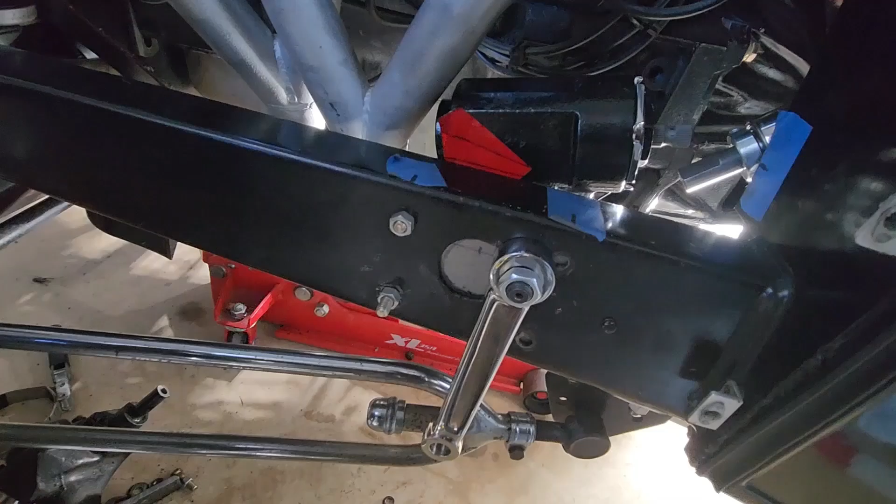Had kind of a brain fart this morning, in that if you look here, that line is the original line on the workbench where I took this flat surface and made it 43 degrees to match the angle of the old Ford column, which is about 43 degrees. I didn't think it all the way through, I guess, because I thought the box has to be at 43 degrees, but it does not.

As you look here, this was my first line at 43 degrees. But bolting in the vertical plate to the inside so I could get a depth measurement here to put this zero clearance against the frame, which is about a quarter of an inch. Might be a little more, but if it is, I'll be able to hand grind that section off to get that extra bit of clearance.

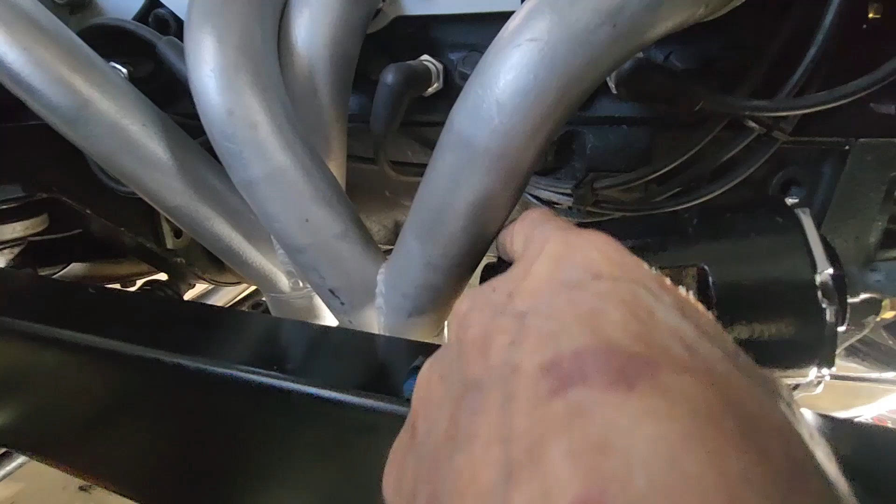So anyway, the brain fart is that the box doesn't actually have to go 43 degrees. In fact, it's tilted 30 to 35 degrees lower, which gets the box away from that bolt down there on the flange for the header, and puts it in a position that maximizes space on the top two pieces next to the header. That's got to be thick material, so I can grind that off a little bit, and if worse comes to worse, I can dimple that side of the header if it proves to be a problem. But I don't think it's going to.

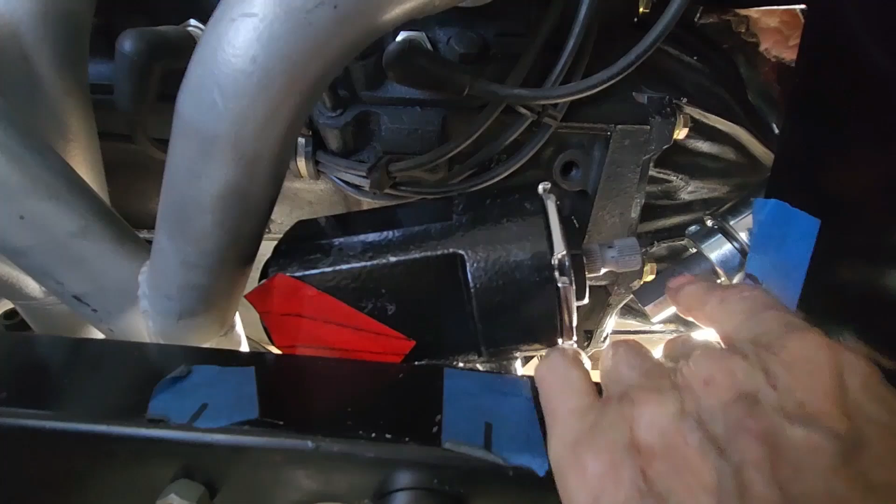Another good advantage of this is that it lessens the angle of the shaft, which requires less of a degree of bend for the U-joint connection to the column steering shaft.

So what I'm going to do now - by the way, this is about a quarter of an inch, so I've got to get that light out of there - this quarter inch is to move the box outward and maximize the extension sticking through here.

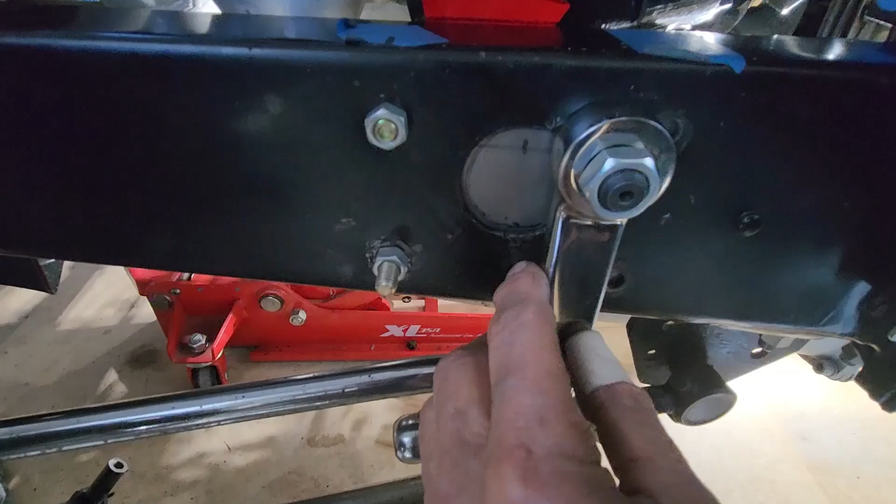So with that, I'm going to pause and pull the steering box back out so I can get the plate off. Be back in a bit.

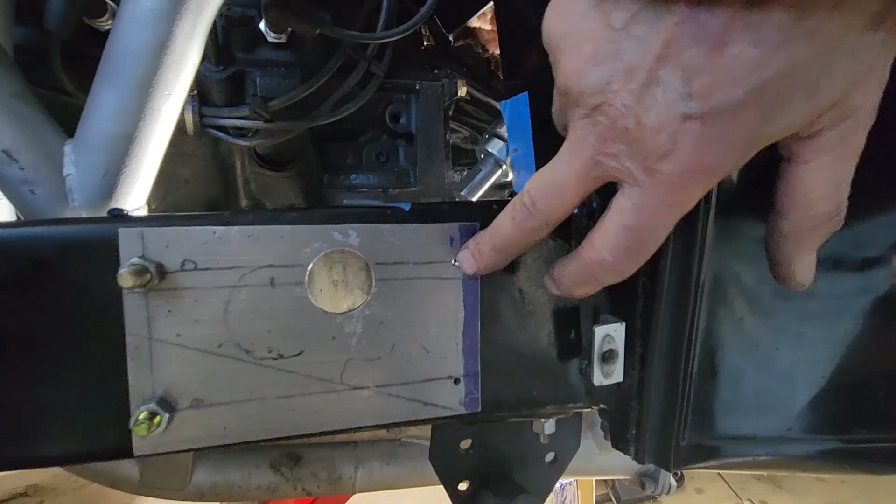Hey, back same day. I've marked the location and drilled pilot holes in the adapter vertical frame plate here and here, and before I open them up to 3/8, I bolted this down and used it as a guide to drill two pilot holes into the frame. So now I take this off, drill these out to 3/8, and open the pilot holes in the frame to 3/8, and that should take care of that. I'll be back.

I'm back, same day. Okay, the vertical adapter steel plate on the inside of the frame rail is fitted in and bolted down. I had the two new holes, as you saw in the previous video piece.

I had a rivet here, an original '32 rivet, that in June of '60, when I first got the car, was one of the first things I did - I cleaned all the welds off all the frame, ground all the crap away in preparation for painting it with black lacquer. I missed this rivet here, not sure why.

Anyway, I'd already ground this flat on the inside so the plate would fit flush to the inside of the frame. I thought I'd just pop it out, and it didn't pop out. Then I said, well, screw it, and just ground it off.

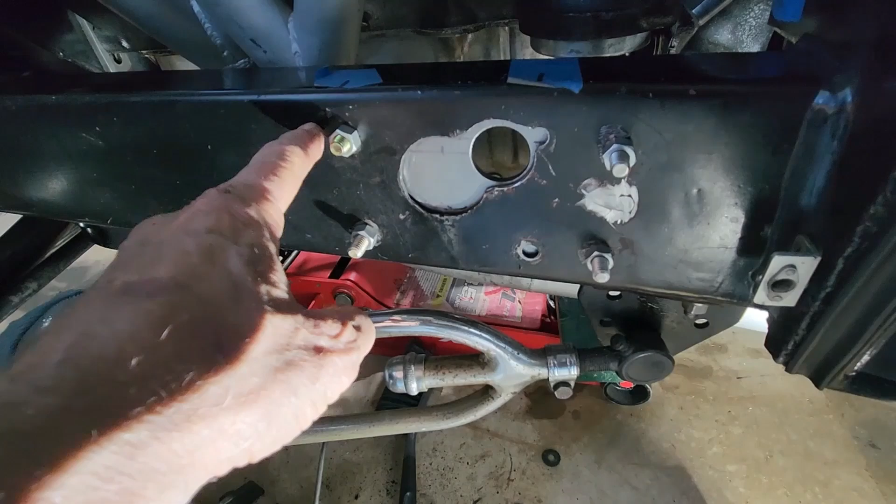It's flat now. The reason I'm concerned about that being flat is that cosmetically, to hide this mess, I'm not going to bother trying to fill this in and weld it and all that. I'll leave it open, but what I'm going to do is make a cover plate out of thin sheet metal, 18 gauge, maybe 18 or 20.

That will be a rectangular plate held in place on the outside with the same bolt holes that hold the adapter steering box plate. What that will do is cover this area and cosmetically make it look better.

In the open frame hole, obviously, I don't really want to get into welding up holes in frames and stuff. But that's where it's at. That's fitting and done.

Hang on a second. There. Put that light out.

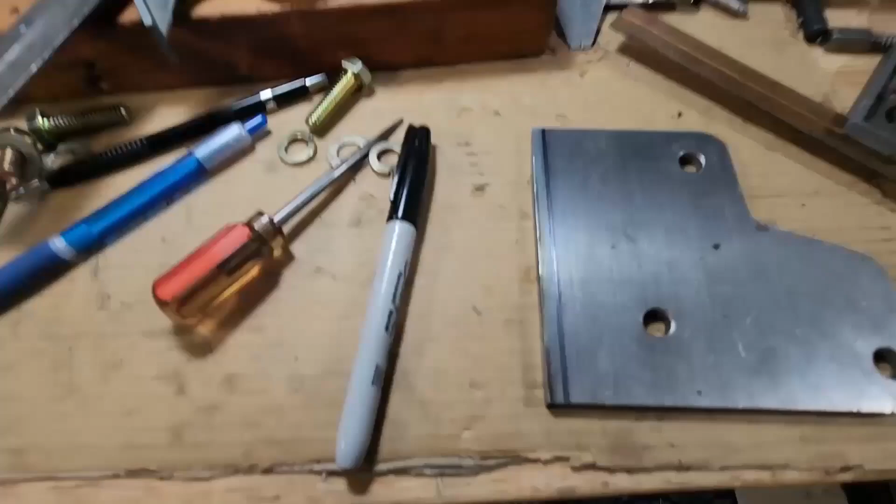What I'm going to do now is, having made the depth measurements for how close the steering box is to the outside frame rail where it sticks through the hole I made, my dimensions indicate about 1/4 inch, and to that end I've got this marked off 1/4.

I'm going to go over to Lou's tonight and visit with him for a while. I've got this marked, and I'll have Lou cut that 1/4 inch off, which should then move the plate in.

This line at the edge of the tape is the 43-degree mark, where I first was thinking this had to be level with the steering column. But that's not the case. It's actually in a better position when it's on this line. This would be the horizontal 0-degree line on the frame rail.

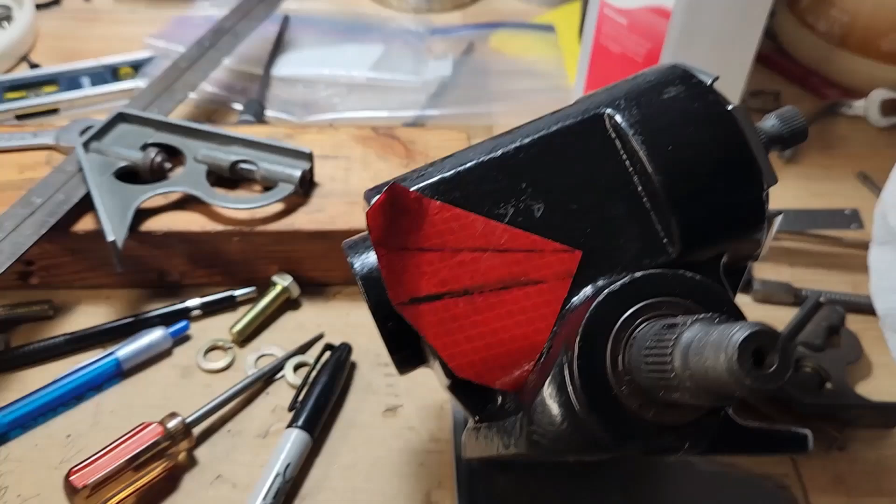Whoops, dropped the camera, or the phone. Anyway, as I was saying, this will be the new horizontal line, which is better from a number of reasons.

That puts these two corners at a better clearance to the exhaust header, and moves this away from the exhaust header flange bolt, so I don't have to worry about that. And yet I've still got the capability to grind these down a little bit if it's needed. That ought to be easy enough to do.

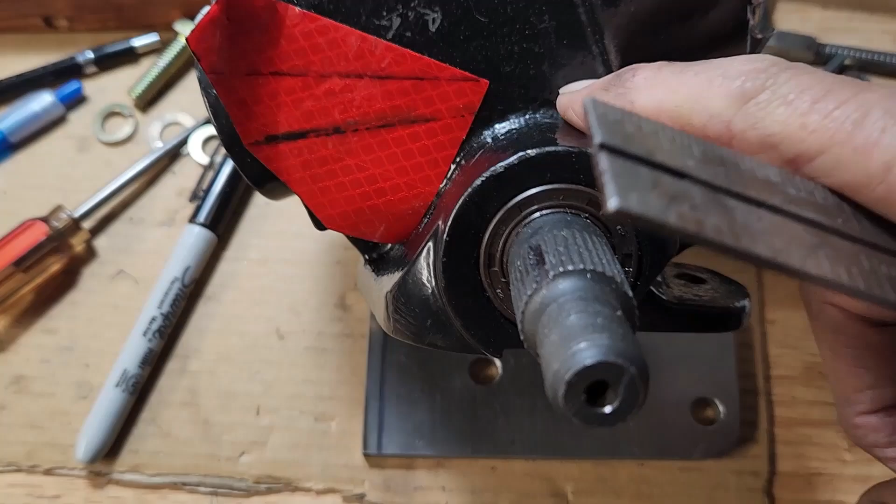The thing about it is that this was the original angle, but when you come down here, it's still using this point as a pivot point. It's still going to fit in the frame, which is pretty good.

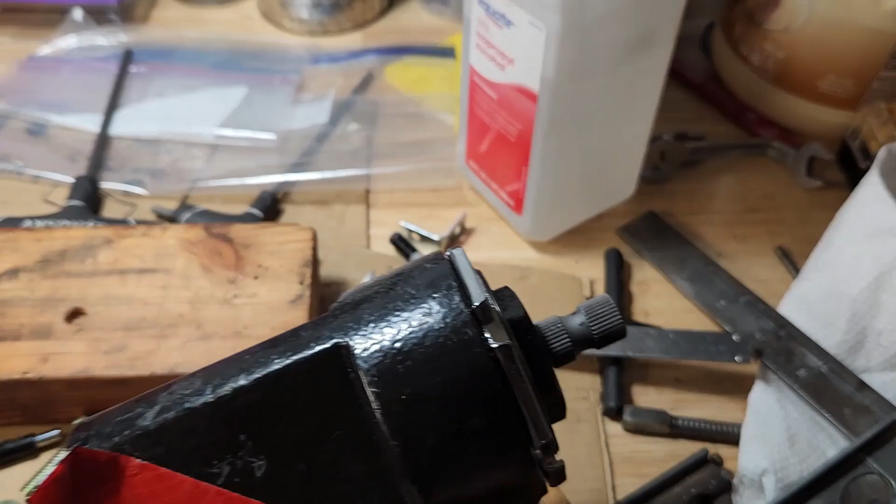As I said, that gives me better clearance to the exhaust headers. It also gives me better access to the 3 bolts that hold the base plate to the steering box. And lastly, third, it drops this angle down, making it easier to make a U-joint coupling from this to the new column tube center shaft, the double D.

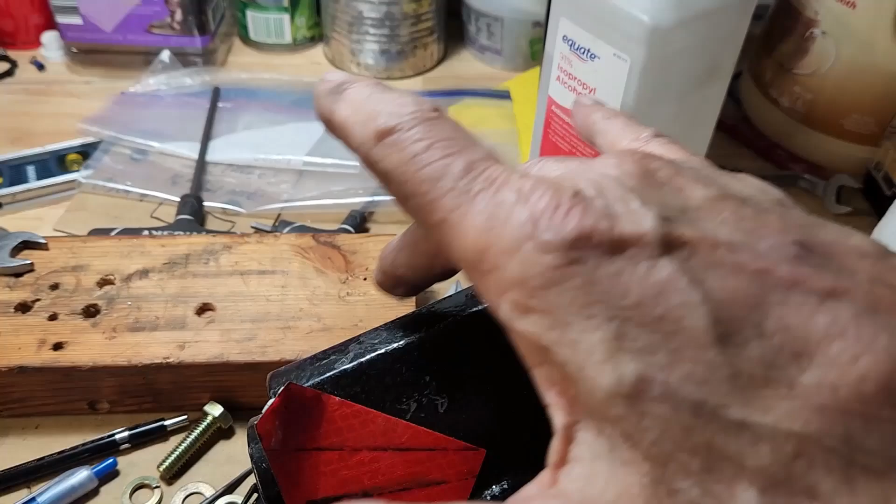I wasn't thinking it through, I guess, originally, because everything on the old column was 43 degrees, and I put this at 43 degrees, not thinking about this being totally disconnected. So that's good, that'll work out even better.

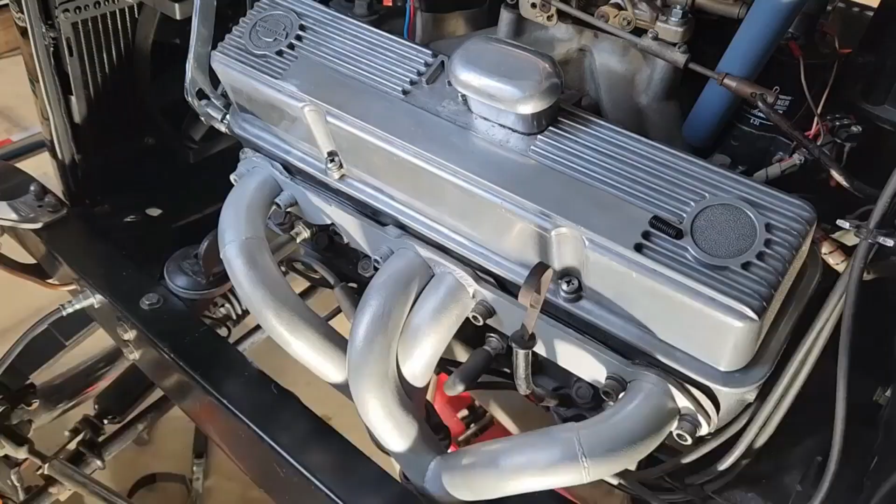Thank you, take care. Hi, this is Bob, Two Old Guys Garage. This is the 32 Coupe, continuing with the Corvair steering box adaptation.

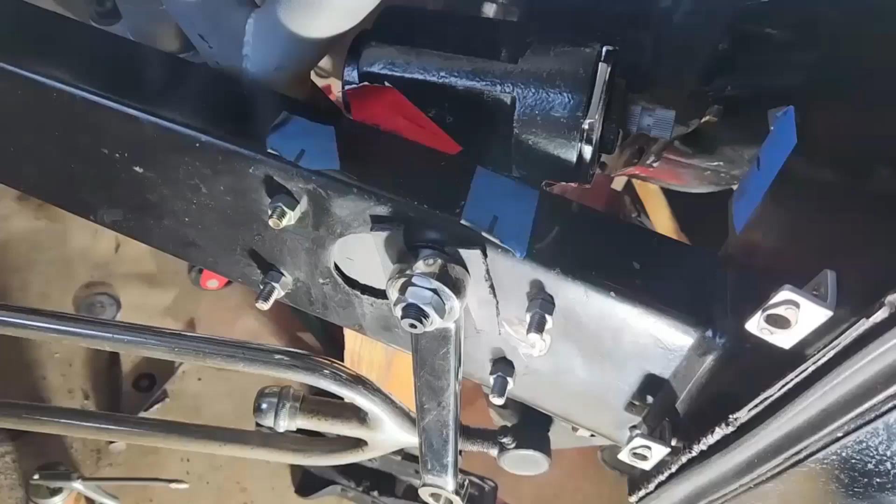Okay, anyway, where I left off, I had Lou cut the extra 1/4 inch off the base plate so that I could fit this to a 0 clearance and get the position that I want, which is where it is now.

And then using the arm and some wedges, I wedged it so it was tight. I just got down underneath and made pin marks. Hi, back again.

Anyway, I used the pin marks from underneath to get the angle and attitude in the X and Y dimension of the base plate to the vertical plate.

And then I constructed, I also took two little angle iron brackets and made the angles correspond to where the angle of the base to the vertical plate was. Then I took it out and drilled and bolted them together with the angle brackets, and now it's in there.

I had just had it out and had opened up the holes on the base plate, triple holes, slightly, and it's good. I got it back in, it's fitting good, it's rock solid, it's zero clearance here.

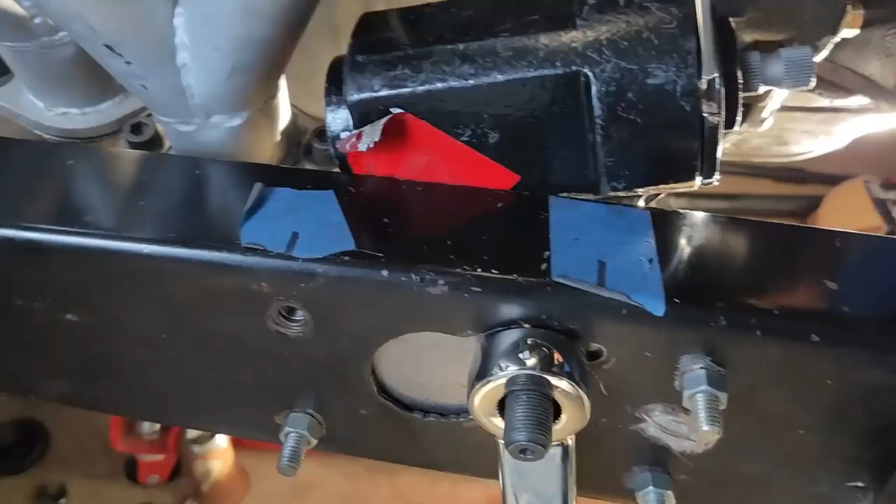There's a little bit of a gap here, but it ain't going anywhere, and it's actually literally in a better direction to make the mate up to the U-joints.

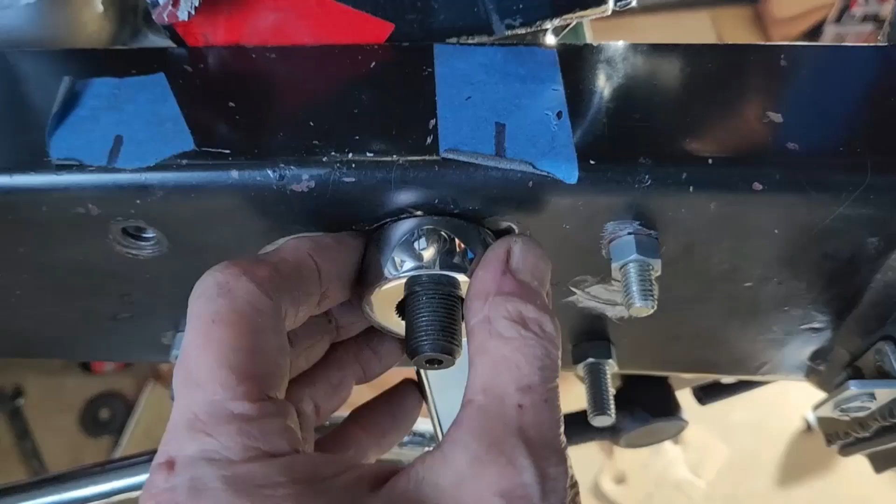So here the arm is on, here's the clearance that I need. I'd like to have it a little bit more, and if I need more, what we will do is actually take and machine this a little thinner.

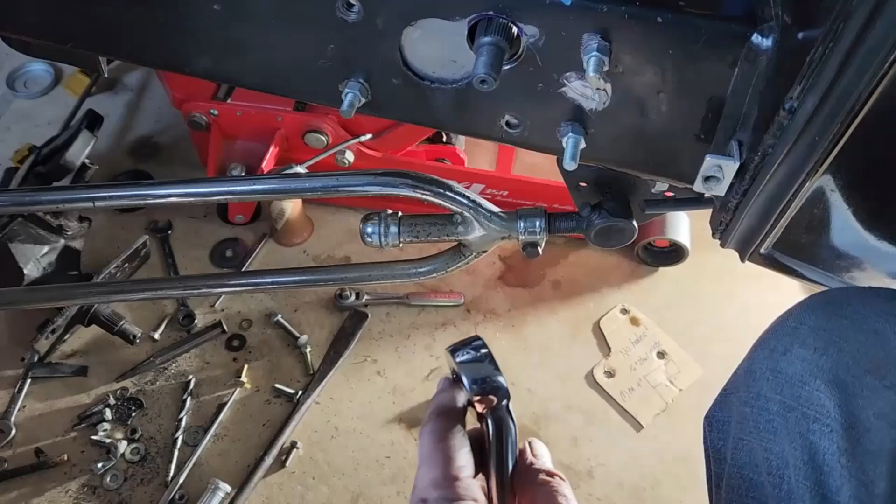Take it, put it in the mill and cut some of the back off to maybe get another 1/8 or something, if it's needed. We'll see. We'll see when I put the cosmetic cover plate on, if it needs it. Anyway, that's a backup of that.

Now, with regards to the...

There's that light again, sorry.

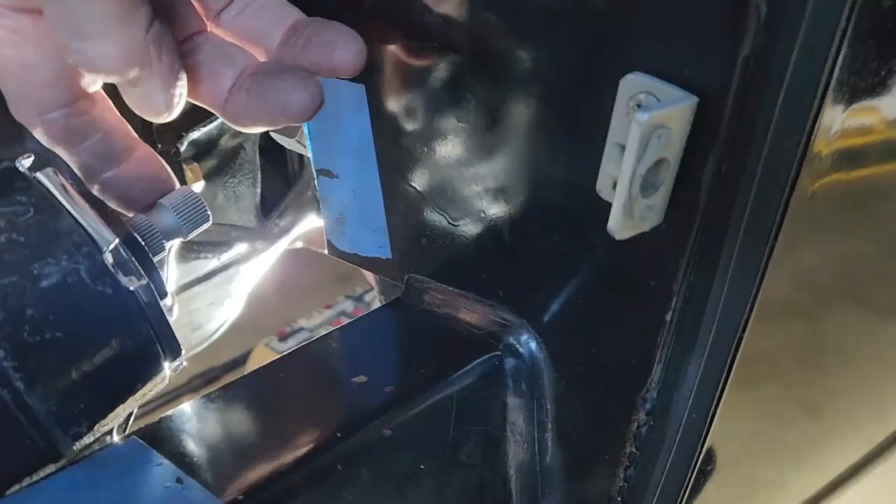With regards to joining the two shafts, this is still too low. I moved it up a little bit, but what I'm going to do is order a double joint - a 5/8 36 spline on this side and a double D on this side, about 5 5/8 inches long. I'll bolt it in, then slide this column and section up and down until it matches the right length to put the double D on there, and I think that'll work out alright.

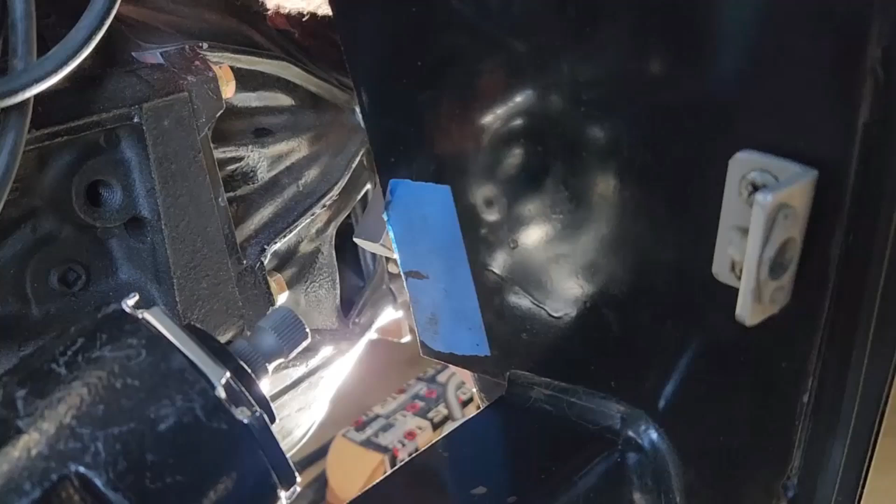Tracking them down, I found it on eBay, Amazon, and a little tip - I found it on Walmart, which also has free shipping, a bit longer, and the shipping isn't next day like Amazon, but it's certainly cheaper - free shipping and 43 bucks versus 50 on Amazon, versus if you go to Borgeson, you can give them your left testicle for the prices they want.

Anyway, I'm going to order that joint for it to come in. And the other good news, let me talk about the depth of this. Let me pause for a second here.

Same day, I'm back. The steering box - what I did was the temporary connection of the base plate and the vertical plate with two small angle iron brackets to hold the relationship. I installed those, and I'll show you those in a little bit. Then I decided I better bolt it in and see what was happening. Right now this is basically zero clearance here, on the line where I wanted it, with this at a good angle to join up there.

Even though it's just a temporary bracket, it's going to be pretty solid, and that's only with the 2 bolts holding the plate tight to the frame.

So what I'm going to do - it's just a little bit snug on the number 2 and number 3 base plate holes of the steering box. So I'm going to take it apart, and then slightly oversize those holes, not very much, maybe a 32nd to a 16th, to make sure I can get it in.

And then it's time to go over to Lou and have him weld the son of a bitch up. I don't think I'm going to bother with tack welds and checking, because it's so solid the way it is. It should be good just to weld it together and add the gusset to it.

So I'm going to pause again, and I'm going to take this apart, and I'll show you what I did on the bench next time. Hang on, take care, be back.

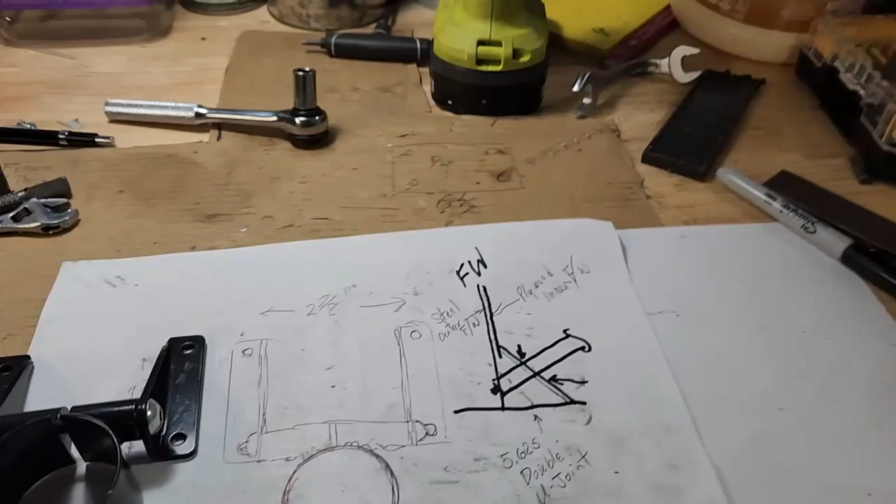Back, same day. While filming the Anglia YouTube video I posted yesterday, part 39 I think it was, Lou and I were discussing the situation, and he came up with a good idea.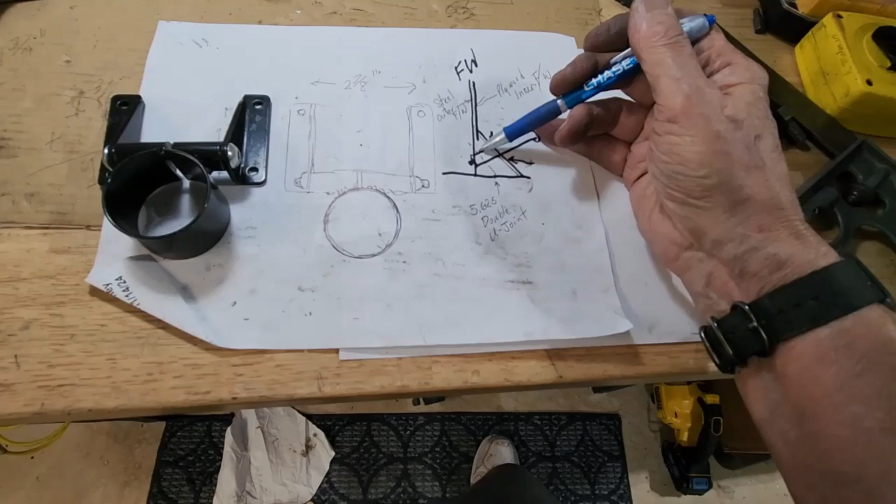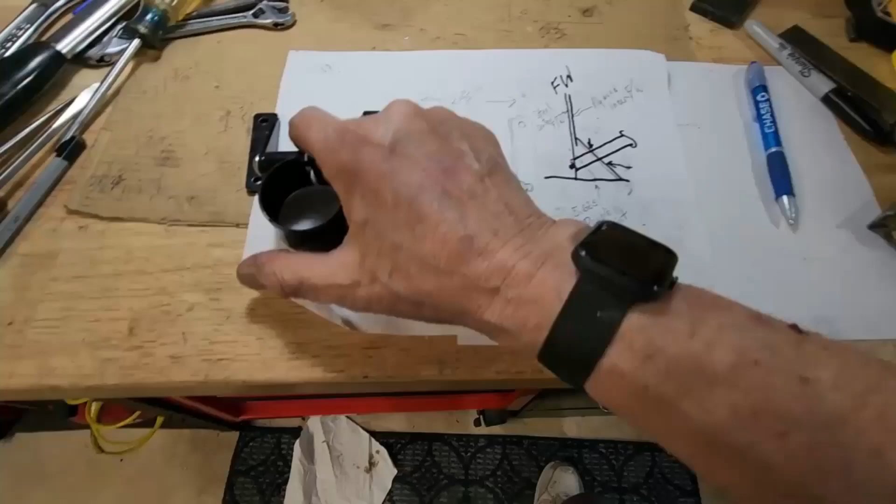This tube, when fitted, is probably going to end up too short here when it's recessed back to fit the double U-joint - you can't attach it here. Lou came up with a good suggestion: why not do the bottom end clamp and put it on top of the outside of the toe board, which is this guy. That'll work out very well because this area, looking at it 90 degrees, going up to the toe board is already parallel sliced to allow the toe board to be removed.

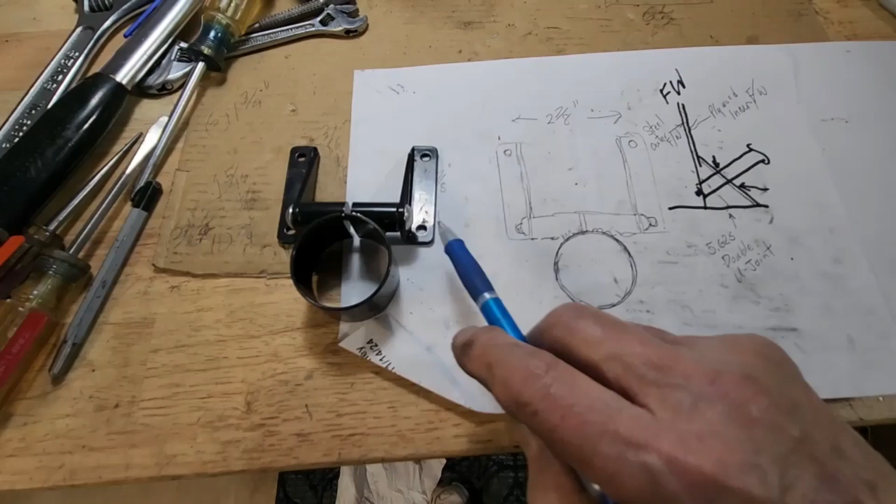So what I'll probably do is take a rectangular thin sheet metal steel plate and connect this to the steel plate, then out on the outer ends to get more leverage to hold it from moving around. If that's a problem, we'll tighten it. So that might be the answer to that issue.

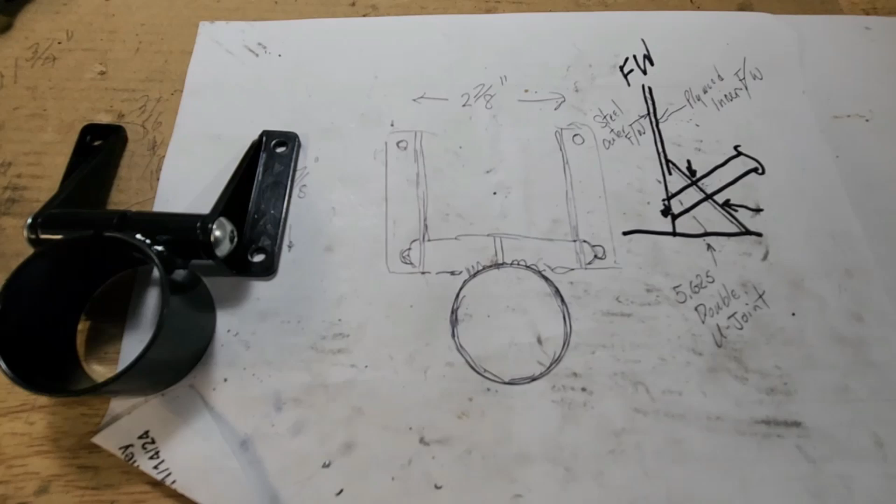Anyway, I think I've said enough for this. I'm going to edit the video, see if I can put something together and throw part 3, segment 2 for the 32 Coupe Steering Box upgrade out there. Take care, everybody.

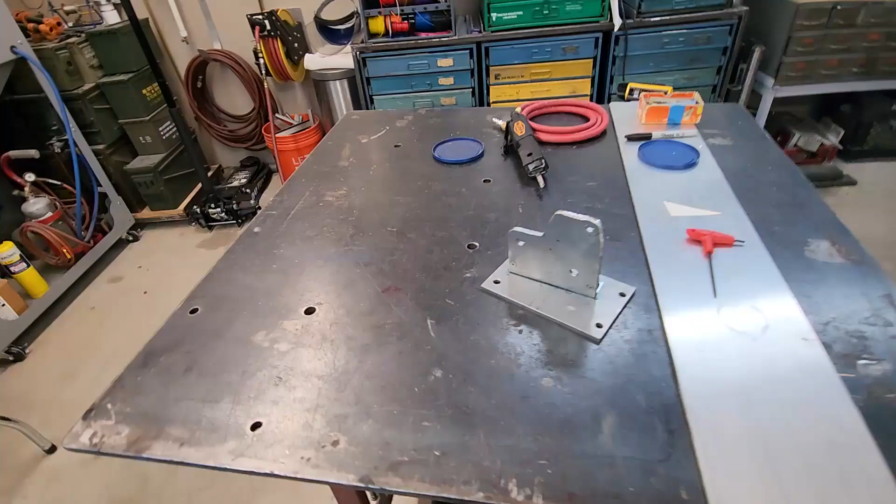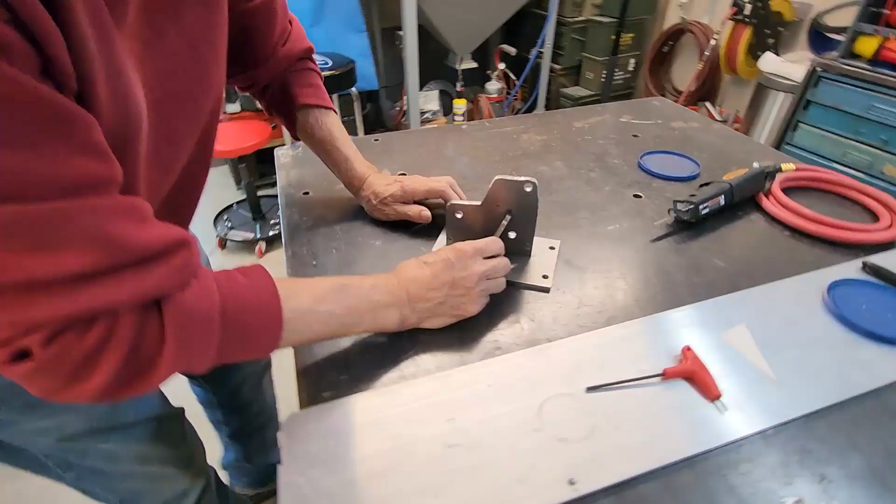Alrighty, one gusset. Press it up. So that should go on there, something like that. Yep, that should work, that'll work. Getting hot. Okay, now we're gonna clean this baby.

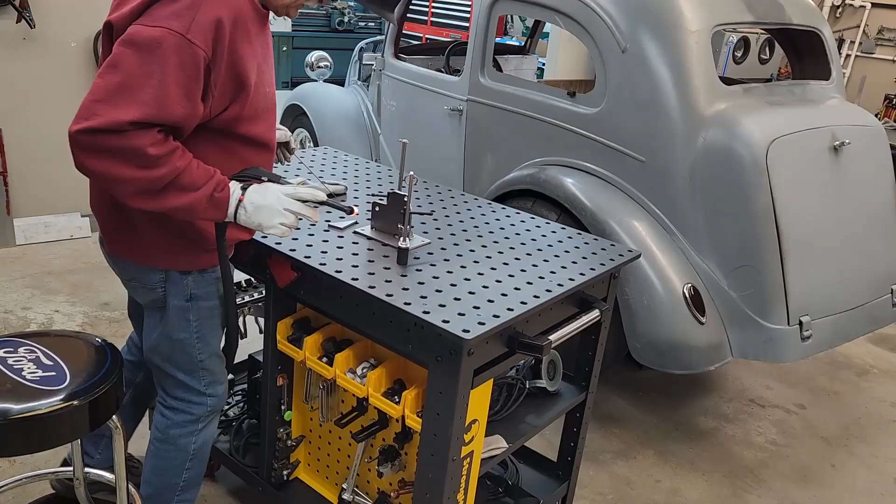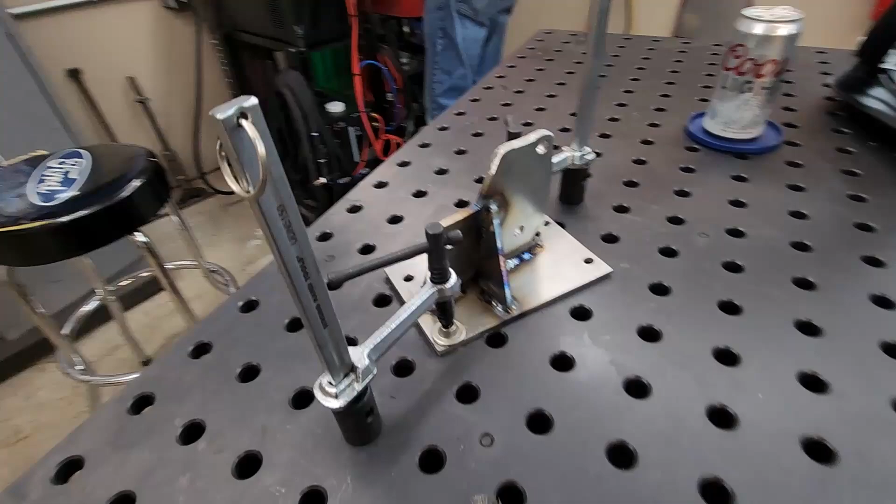All right, same day. Lou welded the 2 plates together for the Corvair adapter and the 32 Ford, letting it cool off. He also made and added a gusset on the bottom, so it should be set to go. All that's left would eventually be to clean it up, prime it, probably paint it black epoxy. Let me see. All right, that's it.

I'm going to add this little shorty to part 3, segment 2. Anyway, catch you all later. Take care. Bye-bye.